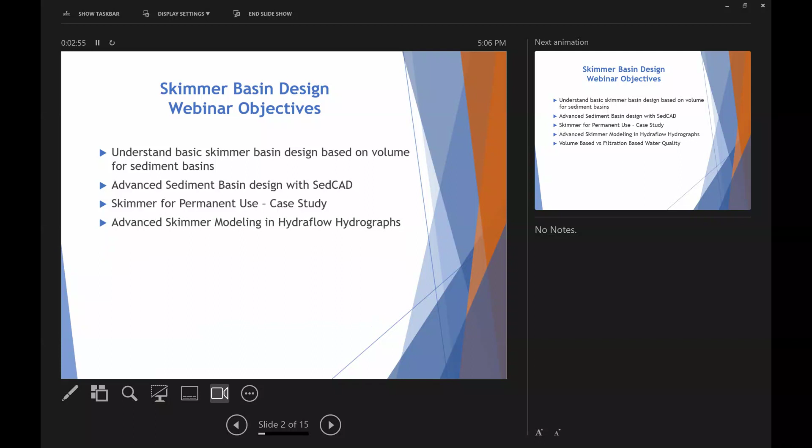So we've already been through several of these. We went through basic skimmer design. We went through SedCAD. We did a case study for permanent use. We talked about the Hydraflow Hydrographs. Like I said, in the last one, we did a volume-based versus filtration-based water quality, and talked about the benefits of that. And so this one is going to be talking about water quality modeling, again, the volume-based versus filtration-based design guide.

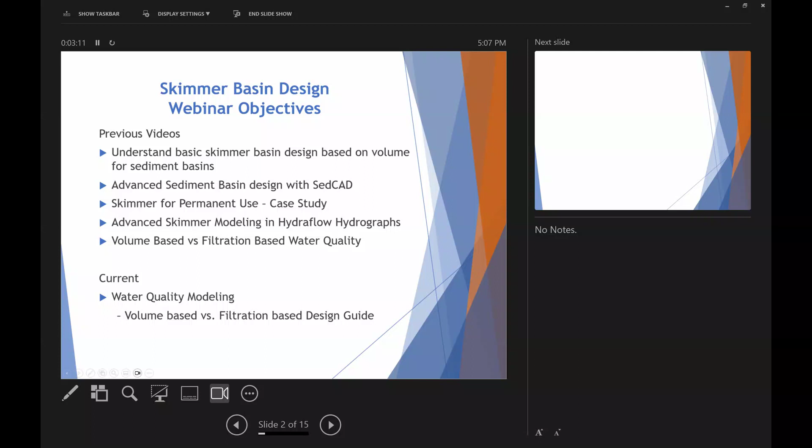So we're going to look at a sample site. The typical volume based is first flush, or whatever that first flush volume is. Typically, it's 1 inch, 1.2 inches in Georgia, up to 1.5 inches in Indiana. It may vary from state to state, but it's in that 1 to 1.5 inch range typically, and it's generally released over 24 to 48 hours. Versus a filtration based design that's based on the flow rate of the filter.

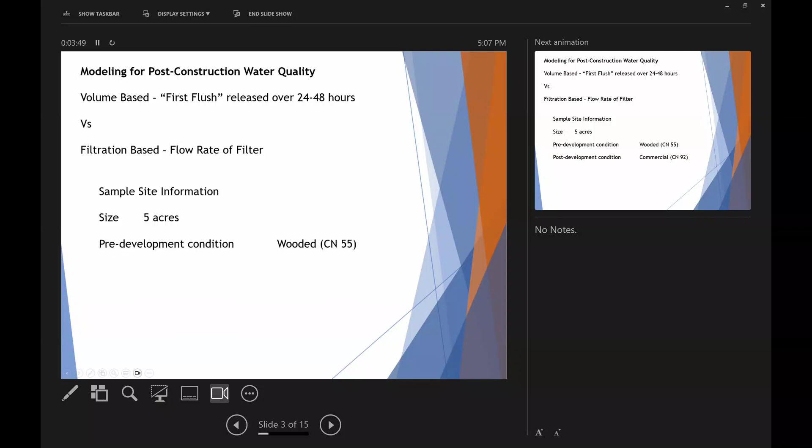So we're going to work on a sample site here as an example. We've got a 5-acre site. We're going to assume that the pre-development condition is fully wooded, curve number of 55, and post-development condition is going to be fully commercial, so we're going to pave most of it to a curve number 92.

So the first thing we're going to do is run through our hydrology model and determine our pre-development flow rates. Based upon a 5-acre wooded site with a time of concentration of 48 minutes as an example, we determined the pre-development flow rates would be 0.72 CFS for a 2-year storm, 3 for a 10-year, 5.42 for a 25, and 10.72 for the 100-year. This is our pre-development flow rates.

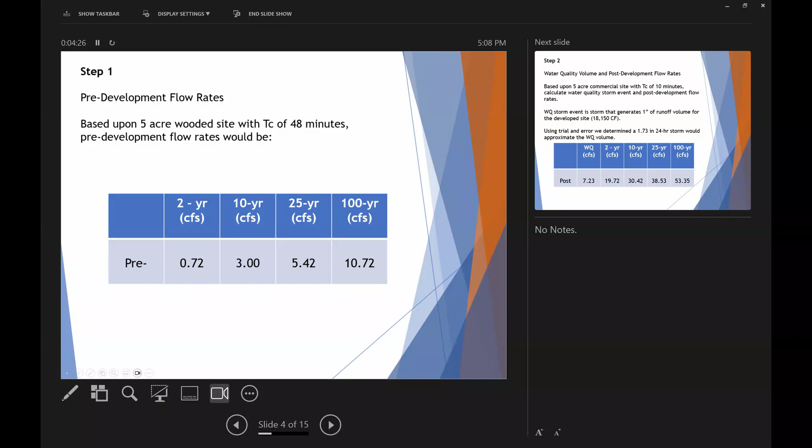So the next thing we're going to do is determine our water quality volume and our post-development flow rate. Based upon a 5-acre commercial site, we just assumed a time of concentration of 10 minutes, and we're going to calculate the water quality storm event and post-development flow rates. For this example, we're going to assume our water quality storm event generates 1 inch of runoff volume for the developed site. So over 5 acres, that's 18,150 cubic feet.

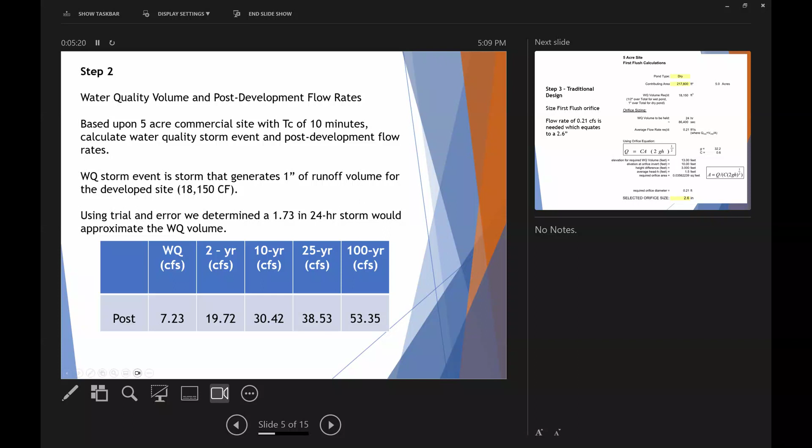And so using trial and error, we came up with a storm of 1.73 inches. That would be a 24-hour storm event to generate that approximate water quality volume. Now, if we run that through our model, that water quality storm peak flow rate is going to be 7.23 CFS. 2-year is 19.72, 10-year 30.4, 25 is 38.53, and 100 is 53.35.

So under traditional designs, what we usually do is determine that first flush orifice size to drain that volume over whatever time period. In this case, we're saying we've got a 5-acre contributing area. We're using a dry pond, and that first flush volume is based on 1 inch over the total area for the dry pond, 18,150 cubic feet. Now we're going to drain that over 24 hours. So the average flow rate required for that is 0.21 cubic feet per second.

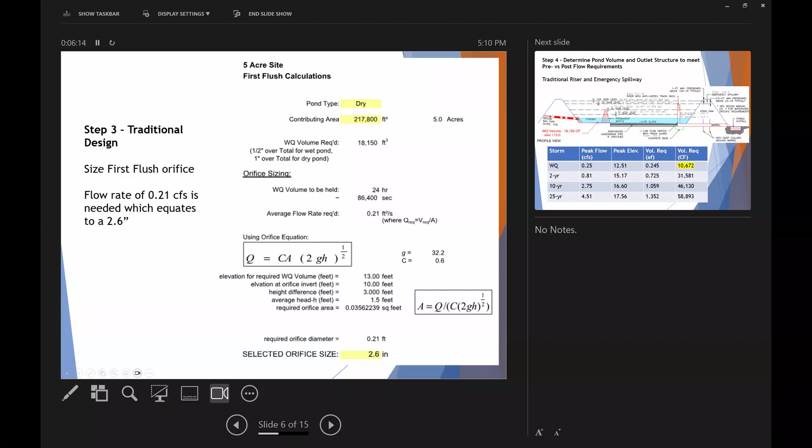We're going to factor in our elevation and such, an average head, and run through that spreadsheet, and we come out with a 0.21 feet or a 2.6 inch orifice that would drain that volume in approximately 24 hours. Now we're going to assume the contractor may have a hard time putting in a 2.6 inch orifice. So we're going to put in a 3 inch low flow orifice here in our design.

Again, that water quality volume is 18,150 cubic feet. So that'd come up to about 3 feet in this hypothetical pond. So at the 3-foot elevation, we put in a 3 inch orifice to control the 2-year storm, and an 8 inch orifice about 2 feet above that for the 10-year storm. And then our riser is at 117.5. So bottom of the pond here is at 110. So we got a 7.5 foot riser in there.

So remember, in our example, we had a 18,150 cubic feet first flush volume that we assume magically appears in the pond instantaneously, which obviously does not happen. So in the real world, when you run that storm event with the hydrograph, you're only using just under 11,000 cubic feet of volume. So in reality, you've got a half a foot or 7,000 cubic feet of volume that essentially you can't work with for your pond.

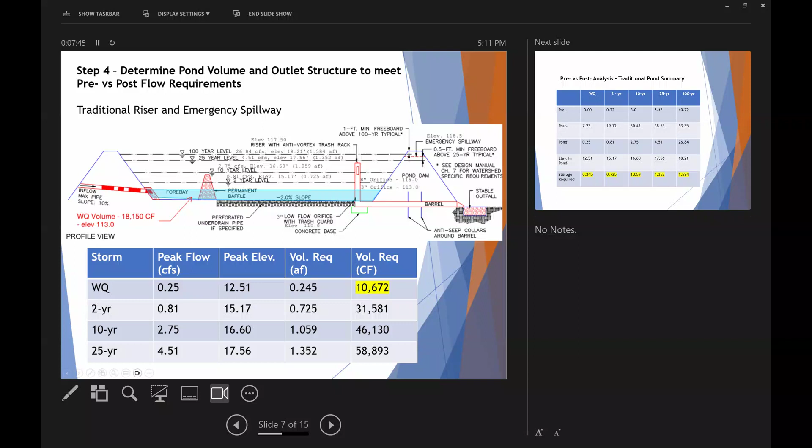And so if we look at our overall analysis here, our 2-year storm, the pre was 0.72, coming out of the pond is 0.8. 10-year, we had a pre of 3, coming out of the pond is 2.75. And then this is the storage required for each storm event. I'm not going to worry so much about the 25 or 100-year storms for this example because we're really focused on the water quality event and the 2-year event for this.

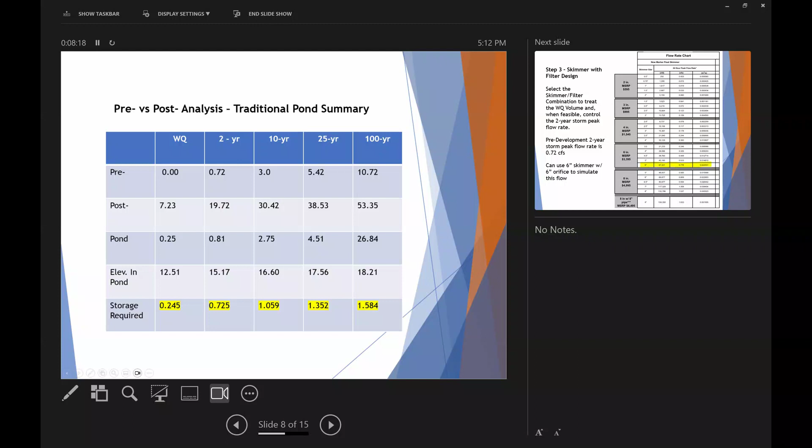So the alternate here is to do the skimmer with filter design. So as we discussed last time, the Rymar water quality filter details, they size the filter so that it works with the max flow rate of the skimmer. So we're going to just kind of ignore the filter as far as the modeling goes. We're going to focus on the skimmer.

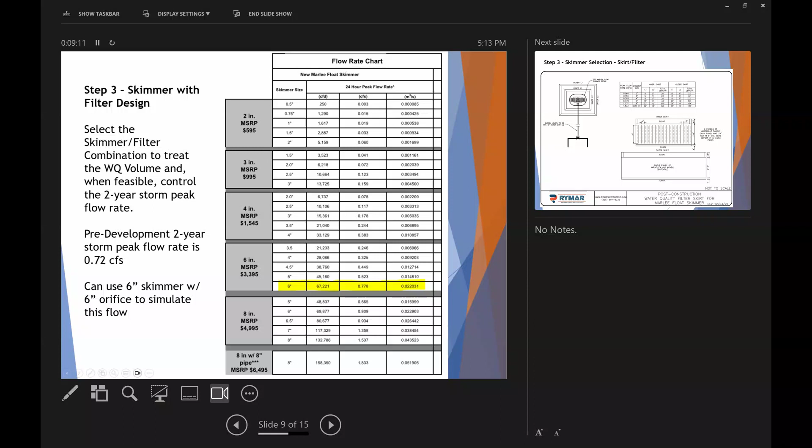We had a pre-development 2-year rate again of 0.72, and if we look at our chart here for a 24-hour peak flow rate, and this would be at roughly a 4-foot depth for these rates, our 6-inch skimmer with a 6-inch orifice flows at about 0.78, so just slightly over that 0.72. If we look at our options here, that's probably the one that's closest. So we're going to model it to start with and see how that works. So again, the filter itself is designed to keep up with the max flow of the skimmer.

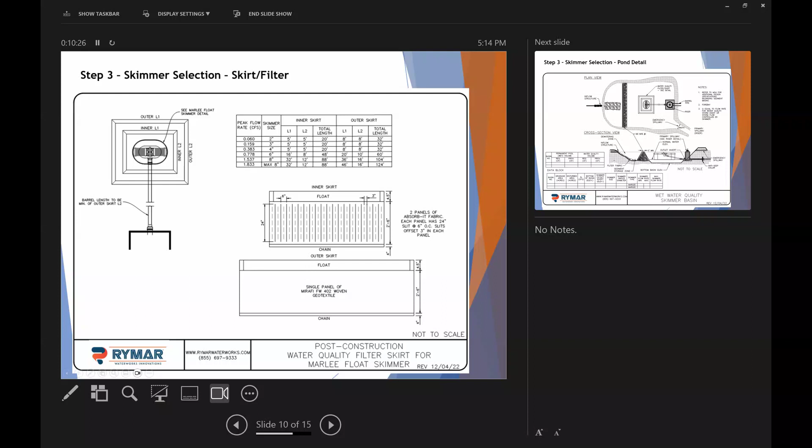And again, we went through last time the inner skirt and outer skirt, but just quick review. Our inner skirt is the Absorb-It. It's 2 panels with slits in it. It's about 36 inches deep. And then the outer skirt is a polypropylene panel, a Mirafi FW402 woven geotextile. It's also about 36 inches deep. Then we also have our pond details again. So this could be in a wet pond or dry pond. And we have all the information you'd put in here for that.

So now let's look at what happens when we run the pond design. So in this case, we're going to use the 6-inch skimmer for water quality, and we're going to use it to control our 2-year storm event. So we're going to get a higher flow rate for our water quality storm. So now we're releasing that storm at 0.7 CFS. Remember, before we were only releasing it at 0.25.

And the skimmer's controlling the 2-year storm at 0.78 CFS, which again, our 2-year storm pre was 0.72, so we're a little closer to the pre. I want to point out here, we're only using 7,600 cubic feet of volume for the water quality storm, comparing that to the 18,150 cubic feet based on first flush.

The other key thing to note here is our skimmer is controlling our 2-year storm. So that volume, we're actually treating up to 27,268 cubic feet of volume in the pond up to an elevation of 14.68. So almost a 5-foot depth. So we're setting at our next orifice here at the 14.68 would be our 8-inch orifice.

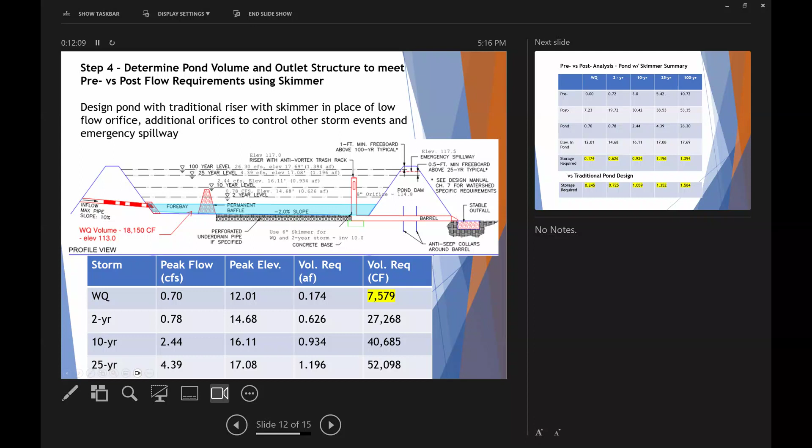So what we're doing is any flow in the pond below that 8-inch orifice, almost 5 feet of depth in the pond, is now being discharged through the filter and the skimmer. So we're treating a lot more of the annual rainfall by doing that. And as we talked about last time, even the small low flow events are having to go through the filter before they get discharged.

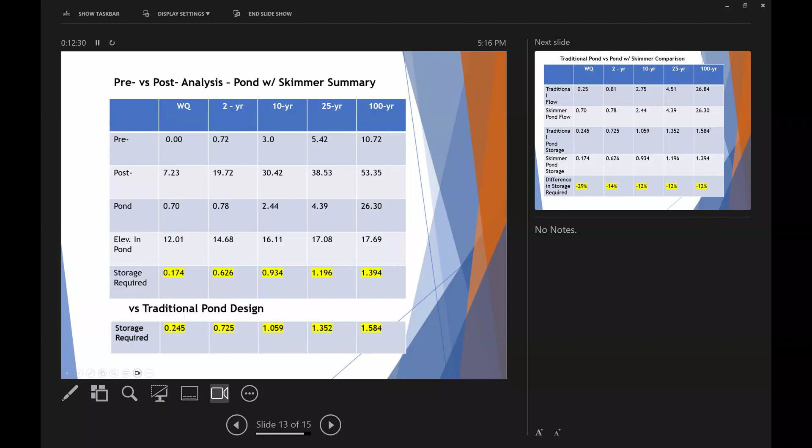And so if we compare the two ways to do this, the skimmer storage required and then the traditional design storage, you see that these numbers are significantly less for the skimmer design. And if we do a percentage of that, for the water quality storm, we're looking at almost 30% less storage required with a filter-based design versus a volume-based design. And if you go to the 2-year and out to the 10, 25, and 100 year, you're looking at 14 to 12% smaller pond volume in order to do that.

So in summary, real quickly, going with a filter-based design versus a volume-based design, you have smaller ponds. Probably when you average that out, you're going to be in the 15 to 20% less volume required in your pond to meet your requirements. You're going to treat more rainfall. So if you design that skimmer to control your 2-year storm event, you're going to be treating up to that 2-year storm event versus a traditional design only treats that first flush volume.

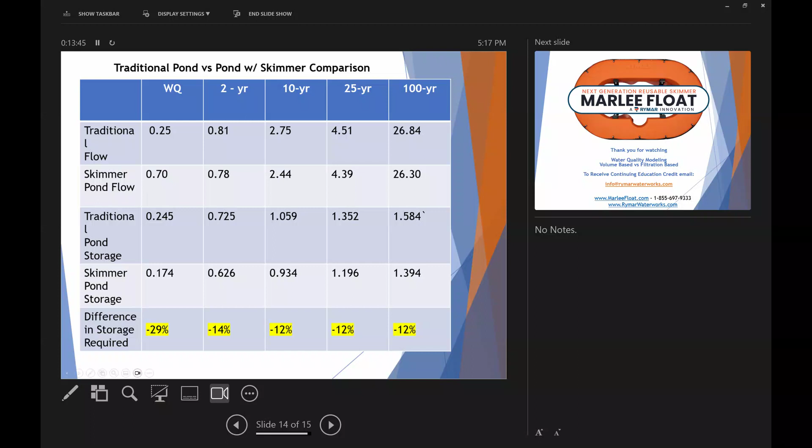And our testing has shown that we get 90% TSS removal. So you're going to be treating that to a higher rate and fully meeting your requirements for water quality at that 90% TSS. So hopefully this makes sense. Kind of quick example of that.